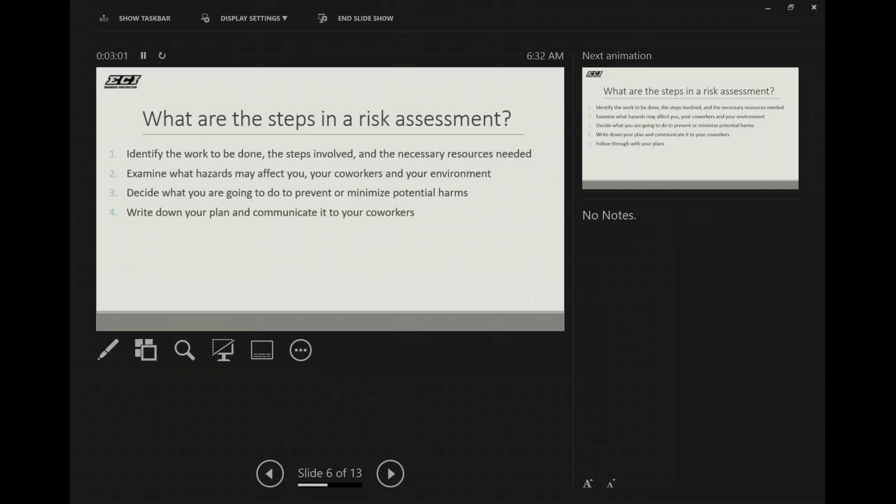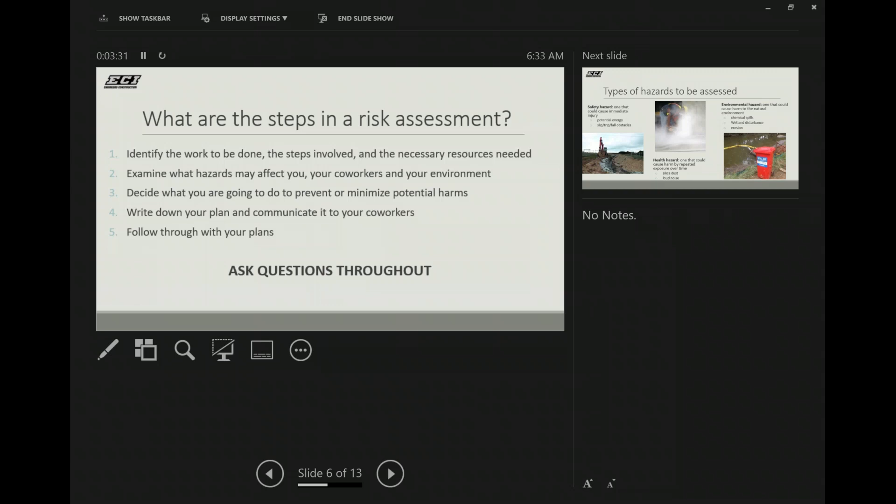And then write down our plan and communicate to your coworkers. That's the biggest thing, that communication part. And then follow through with your plans. Really try to execute. And if you do alter the plan, make sure you communicate that to everybody that's working on the crew. The biggest thing is always ask questions, always challenge something if you're uncertain. When you have uncertainty, there's a big gray area there for something bad to happen. So trust your gut. If you feel like something's not quite right, say something so we can get it addressed. Health and safety is available 24/7, so please give us a call if you need us.

So the types of hazards that we want to really be focusing on are, of course, the safety ones. What is the potential for injury risks? Those are the falls, the excavation, the caught in between, the struck by, the electrical. Those are the ones we want to make sure we are addressing. We got that potential. What are we going to do? How are we going to work safe around that hazard? Then we have the health hazards, which is the silica, the noise, things like that that don't really harm us too much right away, but it's around. So what kind of controls are we going to put in place with that?

And then we have the environmental ones. What could harm if something happens, such as spill kits, wetland disturbance, erosion, stuff like that. So those are the main 3 categories that we need to focus on each and every day on our job sites. We can't get complacent. This is the time of year when we can really get complacent with these things. We really need to raise our awareness and keep our tolerance where it needs to be, so we don't say it's not that big of a deal. We want to make sure we address every little situation we're encountering out there so we don't have a really bad accident.

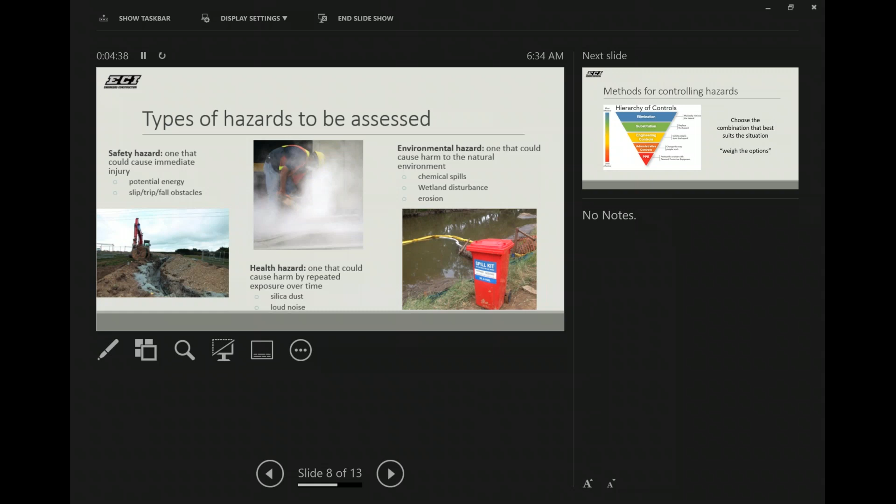And again, through our hierarchy of controls, we want to make sure we're working from the chart down. We want to try to isolate the people from the hazard as much as we can on our job sites. We want to change the way we work. We just can't rely on PPE. If we just rely on PPE, then we're going to have accidents, because you really need to focus more on how we're going to safely work around the hazards, with distances, with guardrails, with personal fall arrest systems, with trench boxes, with shoring.

Those are the best means and methods to work safely around the type of work that we do. There's a lot of exposure out there, and we kind of saw it this week with how many accidents we had. We really need to focus on this tool, making sure we're doing these types of thought process before we just jump in for the day.

And I know it changes, it's construction, it's constantly changing. So we really need to make sure that we're communicating that throughout the whole entire crew, and just kind of weigh your options. Always try to think, and I feel like our tolerance for safety hazards is not where we need to be, because we need to be focusing more on saying, we need to just stop for a second, or it's time to alter our plan a little bit to make it a little bit safer, because we're taking on unnecessary risks right now.

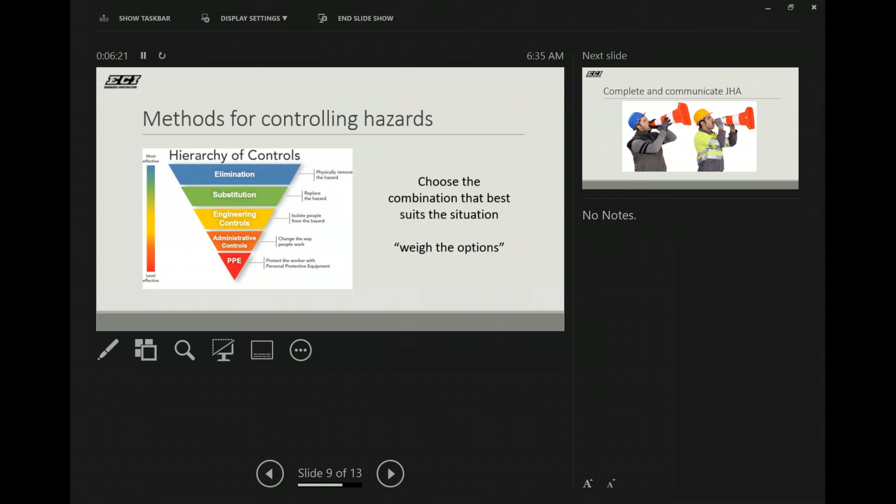And it's a little bit as we're just not quite communicating the way we need to communicate. We have a lot of support here, so utilize it. Ask questions, ask for help, and we'll do anything we can to make sure that you guys work safe each and every day out here, so nothing bad happens. Are there any questions regarding our JHA? Let's make sure we're doing it.

Let's go through it. Let's make sure we have a nice little 15-minute powwow together before we get out and start the day, because we want to make sure that we're communicating our hazards, what our controls are, so everybody can go home safe and sound. We don't want to see anybody get sent in an ambulance ride, anything like that. So we want to make sure that we are doing our due diligence when it comes to site safety out there on our projects. So it's important. No other questions? I'll pass over to Ken for the corporate announcements.

Okay. I don't know if there's any PT 360 appointments available. They're out. We completed it on Tuesday. Oh, okay. It was last week. It was Tuesday, this week. The 8th. I didn't read it very carefully, did I? There'll be another one coming up in a few more weeks, right? November. Okay. And then, of course, fuel cards.

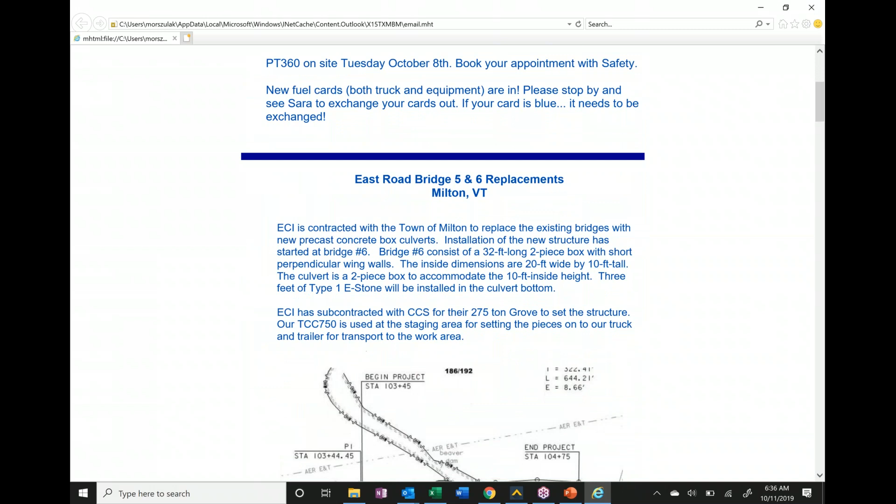Left that on there. And for the project, we're profiling the East Road Bridge 5 and 6 replacements in Milton, and we're contracted with the town of Milton to replace these existing bridges with new precast box culverts. Installation of the new structure had started at bridge number 6, and it consists of a 32-foot long two-piece box with short perpendicular walls. Short but tall. Short meaning short in length. They're certainly tall. The inside dimensions are 20 feet wide by 10 feet tall.

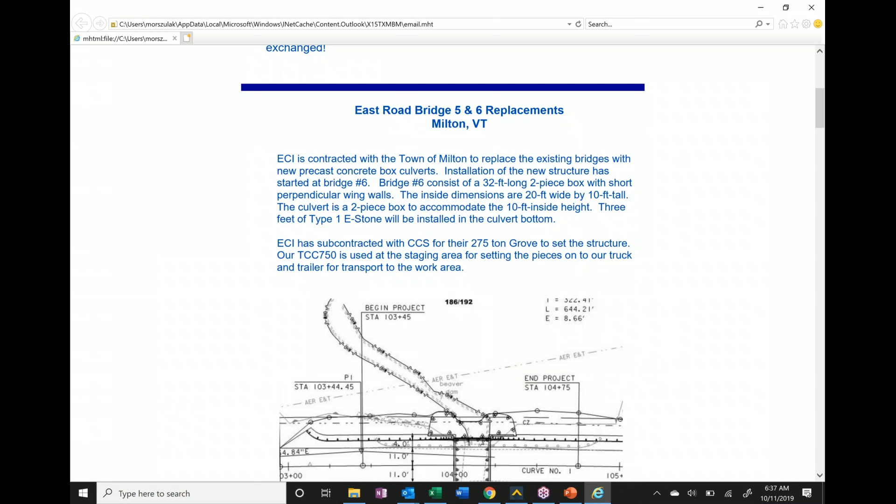The culvert again is two-piece to accommodate the height, because it can't transport that over the road. And they're using 3 feet of type 1 E-stone, or erosion stone, inside the culvert bottom. So we subcontracted to CCS with a 275-ton Grove to set the structure, and we used our crane at the staging area to handle the pieces to send them off to the area.

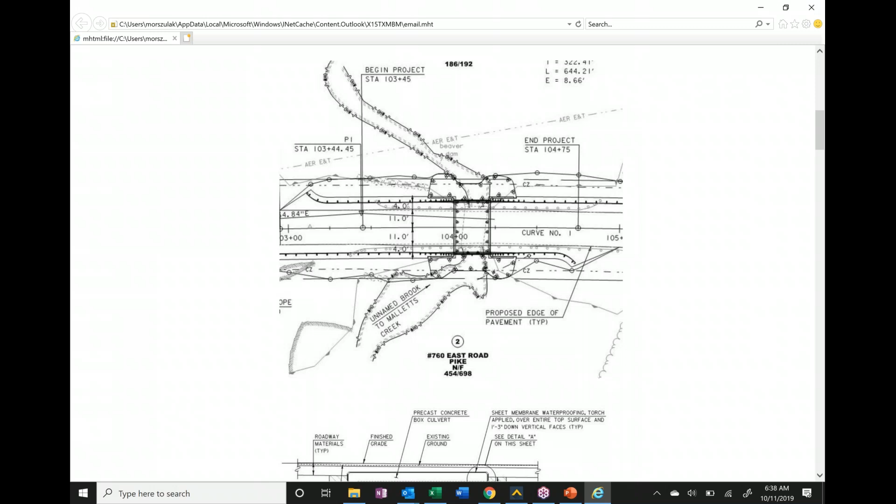A couple images from the drawings, and you see what I meant by short is the wing walls are, and the structure is quite high. It's odd to see the structure high and the wing wall short. And it is kind of a short box too, just being 32 foot and just barely from guardrail to guardrail. You see the joint is right here, so there's a bottom and a top piece, and we'll see in the pictures here, and the E-stone inside.

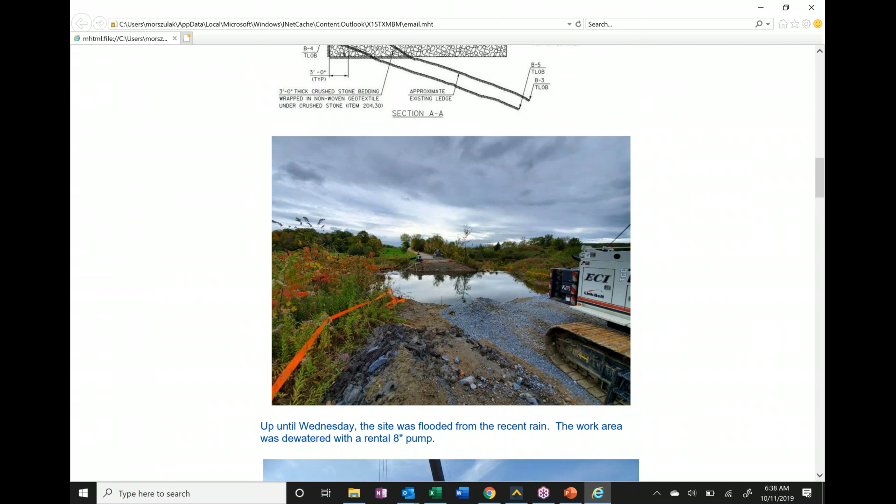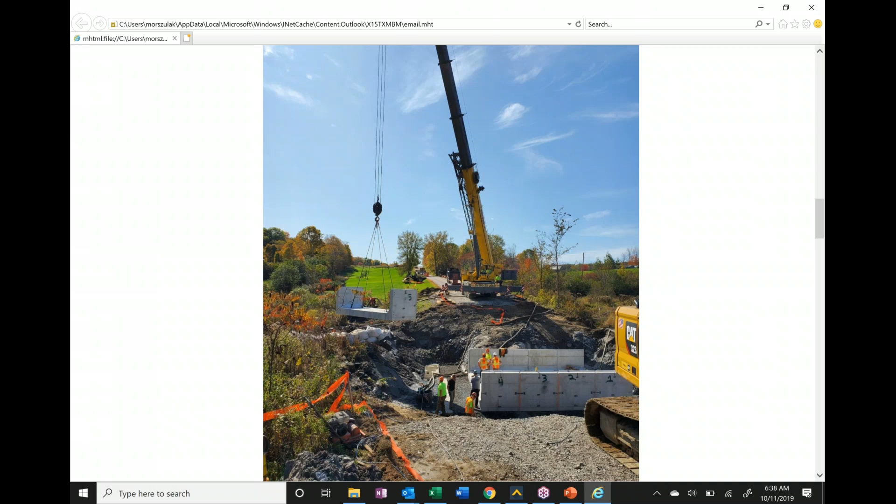This is actually a few days ago, not very many days ago, really. Just totally saturated and waterlogged and filled right up to the brim. There's a grade stake right there, and the grade stake is still there. And we used an 8-inch rental pump to get the bottom dry. You can't really see it, but the grade stake's right here, right near the top tip. So quite a difference in a day. A day makes a big difference with an 8-inch pump, I guess.

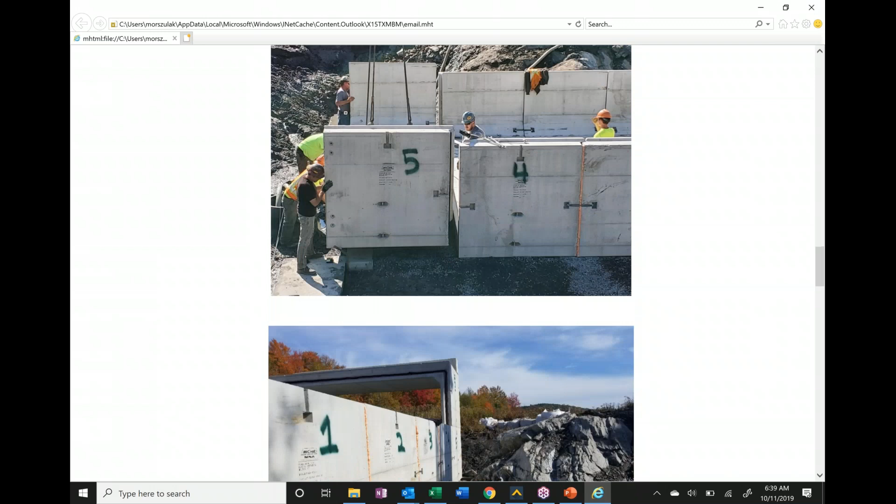And you see the bottom pieces going on and coming together. There's only 5 pieces in length. And the top is going on the end section. They're doing it top and bottom. It's odd that they're doing top and bottom, usually it's just one. Well, the height. What's the height? 10-foot height plus the thickness. You don't have the room to get it over the road. Yeah, the height is kind of odd. I don't know why they really needed that height.

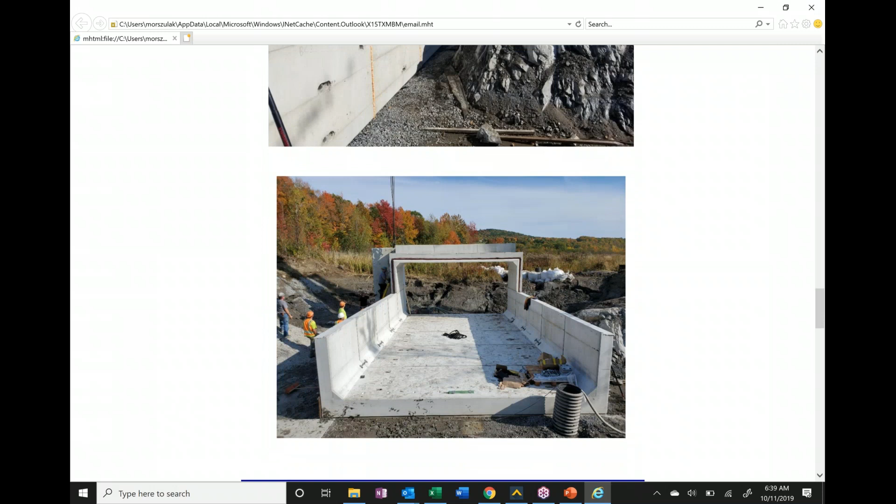And you see they're starting to set one of the pieces of the wing walls. You said there's 4 feet of stone going in. It's 3 feet they're calling for, I think. But yeah, it's going to be a muddy bottom. Everything there is muddy. So as soon as you put the E-stone in, the first storm's just going to fill it all up anyway. So whatever.

Okay. Have a safe day out there. Make sure you do a good job hazard analysis.